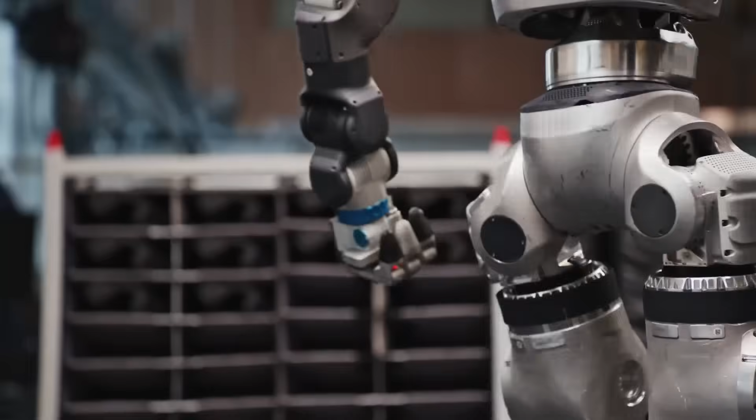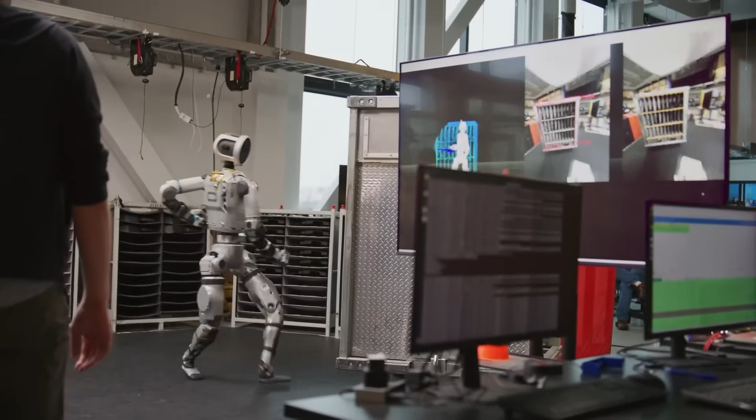You ever get that weird feeling when a robot moves just a little too naturally, like it's thinking, reacting, almost understanding? That uncanny moment when it doesn't just look human, it acts human? Well, that's exactly what hit me the moment I watched the latest update from Boston Dynamics.

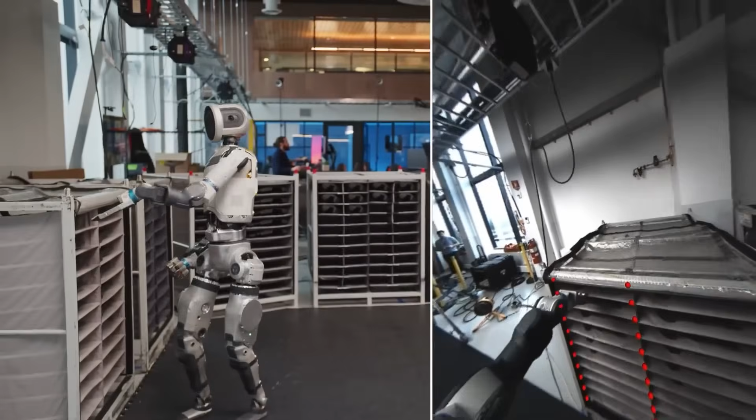Atlas, the humanoid robot we've seen flipping through obstacle courses and running like a mechanical gymnast, has taken a giant leap. This time, not in height or speed, but in awareness. What they just unveiled isn't just a smarter robot, it's a different kind of intelligence altogether.

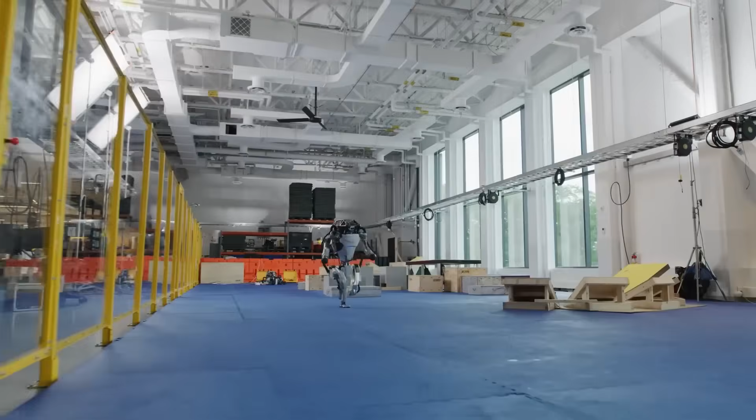I mean, watching it perform a routine task suddenly didn't feel routine anymore. It felt intentional, even thoughtful. Like, I found myself forgetting I was looking at a machine. Let me walk you through what just happened, because trust me, it changes everything we thought we knew about robots.

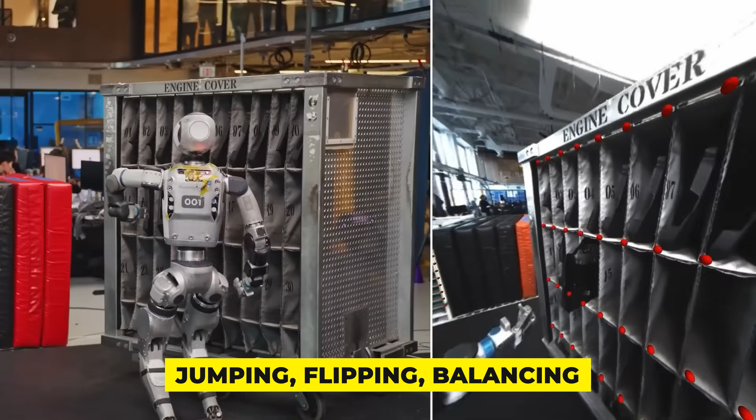Boston Dynamics has always impressed me with Atlas's physical abilities. Jumping, flipping, balancing like a parkour master. But this latest update, it's not about movement, it's about perception. And honestly, that's way more important.

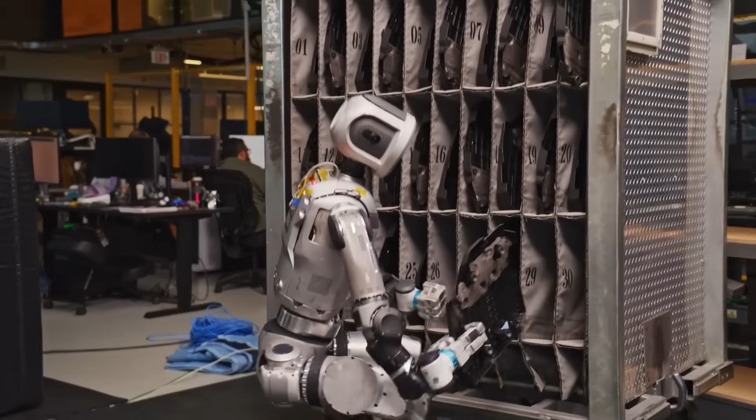Because if a robot's going to work in the messy, unpredictable world where you and I live—factories, homes, warehouses—it can't just be strong or fast. It has to see, to understand, to adapt. And now, Atlas can. So here's what blew my mind.

In the latest demonstration, Atlas performs a seemingly simple task. It picks up an engine cover and installs it onto a mock car engine. Doesn't sound like much, right? But the moment I looked closer, I realized what's happening under the surface is anything but simple.

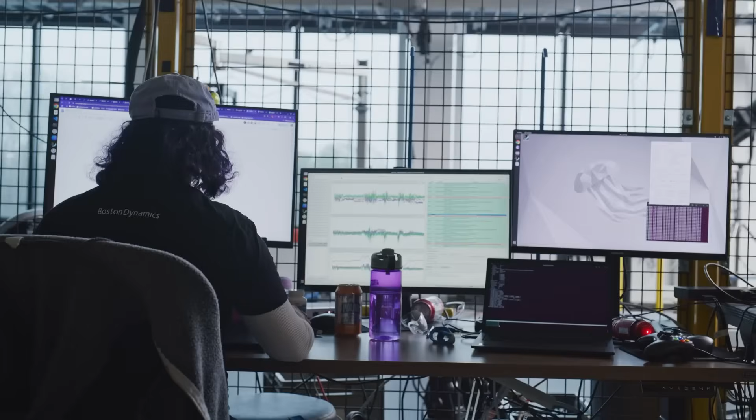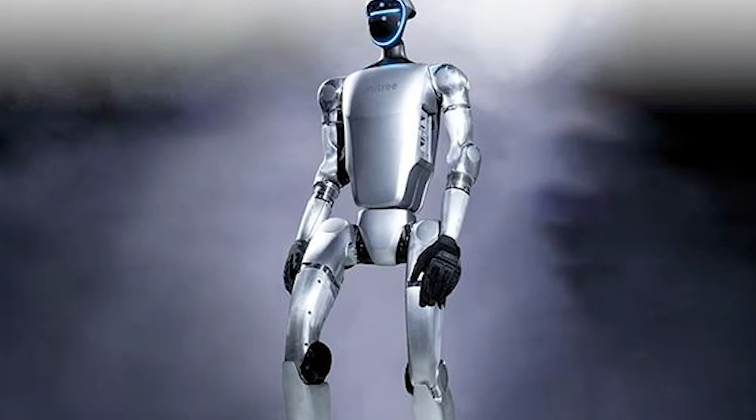Atlas isn't just grabbing something and placing it. First, it scans the environment and identifies the correct object. On its own, it figures out how to approach it, how to grasp it, and how to navigate around any obstacles in the way. And it does all this without any pre-programmed script tailored for that task.

That means it's not following a plan it was fed in advance. It's making its own plan, in real time, based on what it sees in the moment. That's perception. That's adaptation. That's exactly what makes this robot feel almost too human.

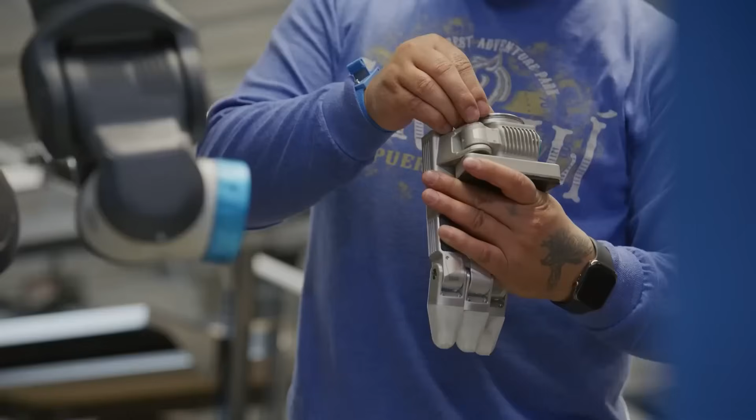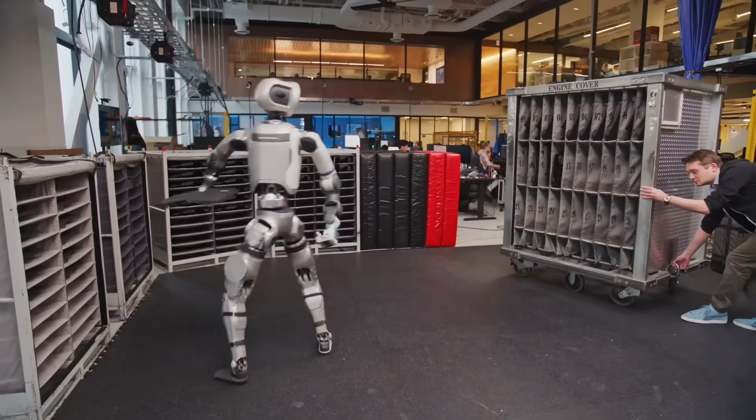The way Boston Dynamics got there is wild. They gave Atlas an upgraded perception system, a fusion of visual sensors, depth cameras, and machine learning models. So now, instead of just seeing pixels or outlines, Atlas understands 3D geometry, spatial relationships, and even the function of objects in a scene. Like, it doesn't just know something is an engine cover, it knows what it's for and where it's supposed to go.

That's not something you can fake with code. That's cognition. When I saw Atlas evaluate the orientation of the object, adjust its grip, and dynamically plan its motion on the fly, I realized something big.

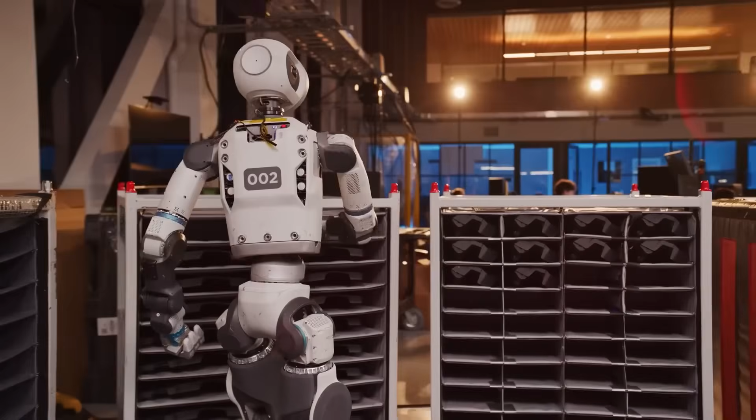This isn't just a robot executing a trick. It's a system that's beginning to reason. And that's the shift. Because up until now, robots could do impressive things, but only under highly controlled conditions. One tiny change in lighting, or position, or timing, and they'd fail.

But not this time. Atlas is now capable of real-time replanning. That means if something unexpected happens, like the object shifts slightly or something gets in the way, it doesn't freeze or glitch out. It recalculates, it adapts, it proceeds, just like a human would.

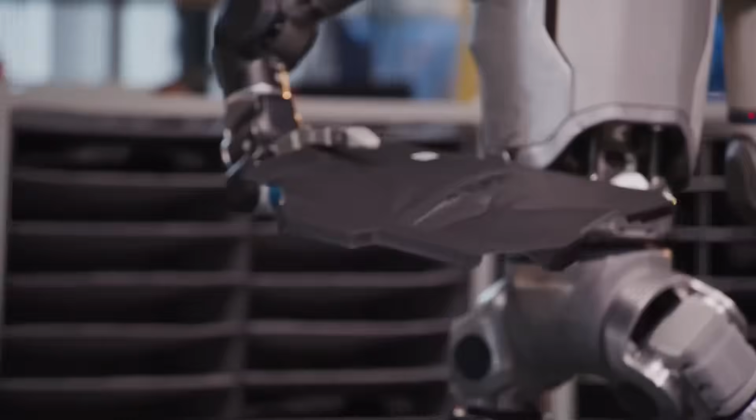That adaptability is a massive milestone in robotics. I mean, think about it. Traditional robots are rigid. They work on scripts, change the script, and they break. But Atlas? Atlas is operating in a flexible, reactive, intelligent way.

And it's all thanks to the machine learning models powering its new brain. This system doesn't just collect data from cameras and LiDAR, it interprets it. That's the real challenge Boston Dynamics had to solve. Cameras can flood a robot with information, but knowing what that info means, that's where the magic happens.

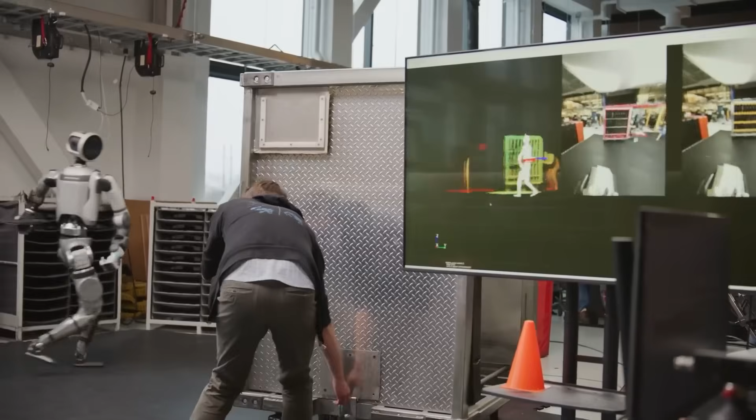And here's the part that really hit me. When Atlas looks at something now, it's not just labeling objects like, oh, that's a chair, that's a table.

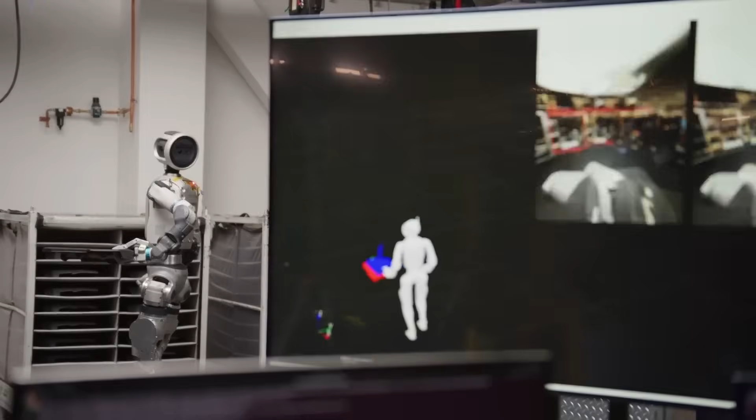It's already thinking about how to interact with it, how to pick it up, what kind of grip it needs, how much force to apply, how to keep its balance while doing it. Vision and motion are now tightly coupled. That's why its movements look so fluid, because it's not reacting in steps. It's flowing from one intelligent action to the next. It's honestly spooky how natural it feels.

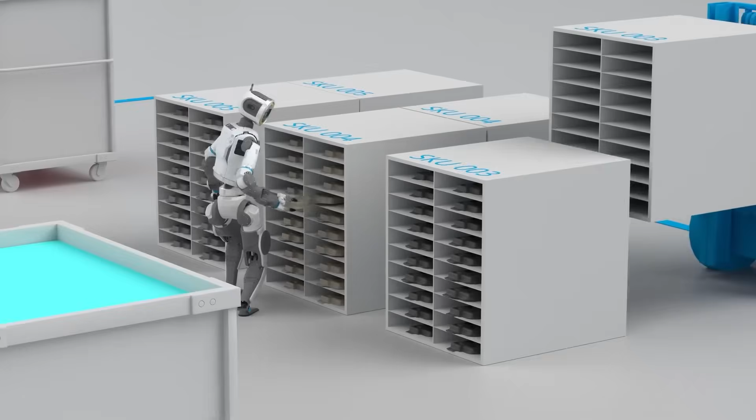Now let's talk about unpredictability. Because even in a demo setup, the real world is full of surprises. Lighting can change, objects can shift, textures can throw off sensors. But what blew me away was how robust Atlas is now. It's not just passively reacting to visuals, it's actively reasoning about what it's seeing. That means it doesn't just detect an obstacle, it figures out how to respond in a smart way.

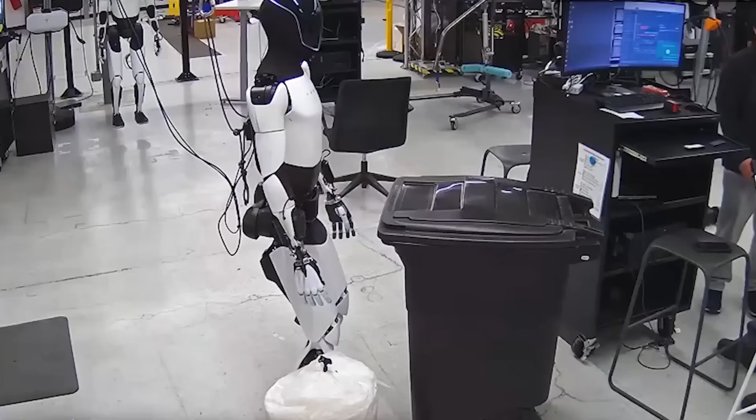But the foundation, it's there now, solid and real. And from what I've seen, they're moving in the right direction. There's also something else happening that's changing how I think about robots, not just Boston Dynamics, but across the entire field. Take Tesla, for example. Their humanoid robot Optimus is being trained in a whole different way. Instead of relying purely on human-controlled data,

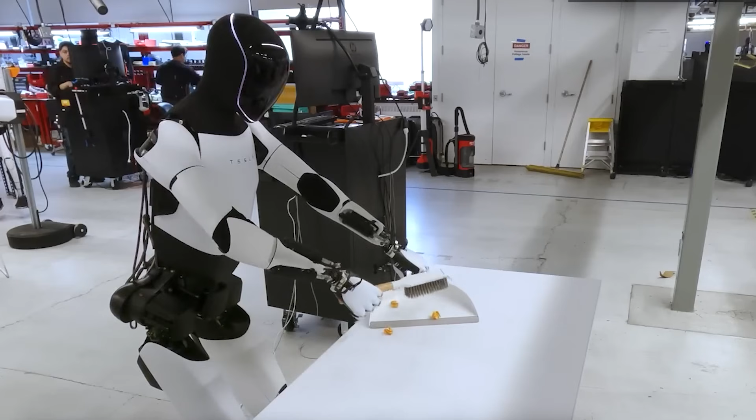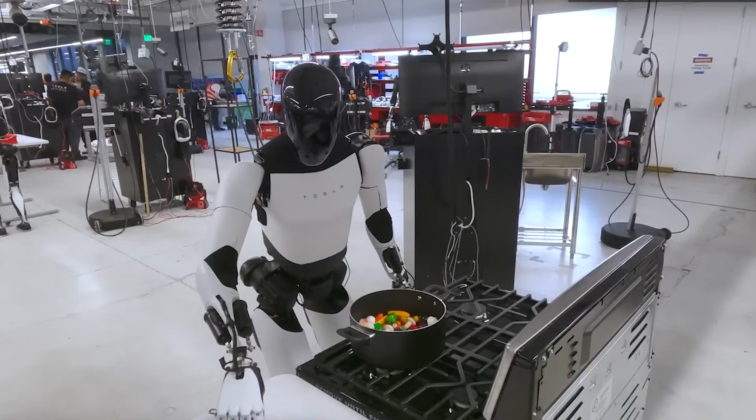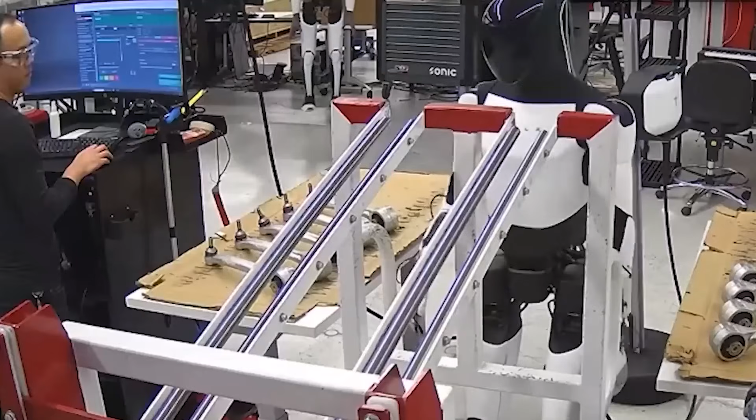Tesla's figured out how to make Optimus learn by watching videos, YouTube-style videos of people cooking, cleaning, folding laundry, and doing everyday stuff. Things I do, things you do. And now the robot watches it, learns it, and tries to do it itself. That's a huge leap, because we're talking about third-person video, stuff filmed from the outside, and translating that into first-person action for the robot. It's like me watching someone tie a knot, and then figuring out how to do it myself without being told step by step.

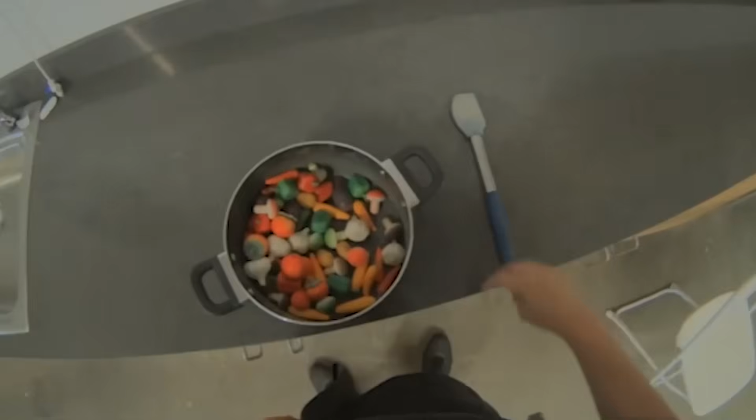Tesla's building an AI system that learns from virtually any video online. That means instead of collecting slow, manual training data, the robot can learn from thousands, millions of publicly available videos. That's nuts. And here's the kicker. Everything Optimus learns gets run through one single multitasking neural network. That's its brain. It interprets natural language commands, carries out complex actions, and even connects what it's seeing to what it's supposed to do. So you could literally just tell it, fold the clothes, and it figures it out based on all the video data it's consumed. That's no longer just programming. That's something way closer to general intelligence.

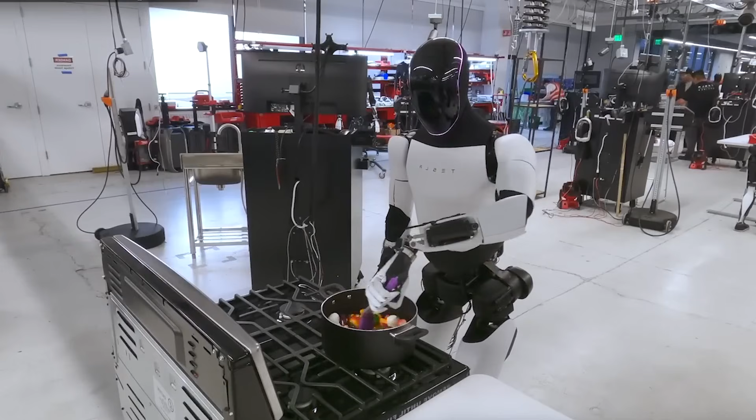Tesla is basically treating Optimus like a child learning to walk and talk, watch the world, try things out, make mistakes, get better. They're even running simulations where the robot learns from its own trial and error before ever touching the real world. That's the same self-play method that made AI unbeatable in chess and Go. Now it's being applied to physical reality. Let that sink in.

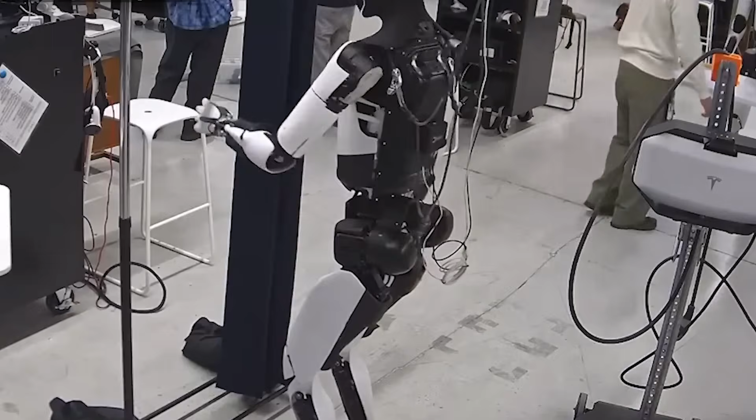Then there's Figure AI. Their humanoid robot, Figure 02, is doing something jaw-dropping. Not in a lab, not in a staged demo, but in a real BMW factory. Figure 02 recently completed 2 back-to-back 10-hour shifts, doing actual production work. That's 20 hours of real labor in a live environment, side by side with human workers. Not hypothetical, not simulated, real.

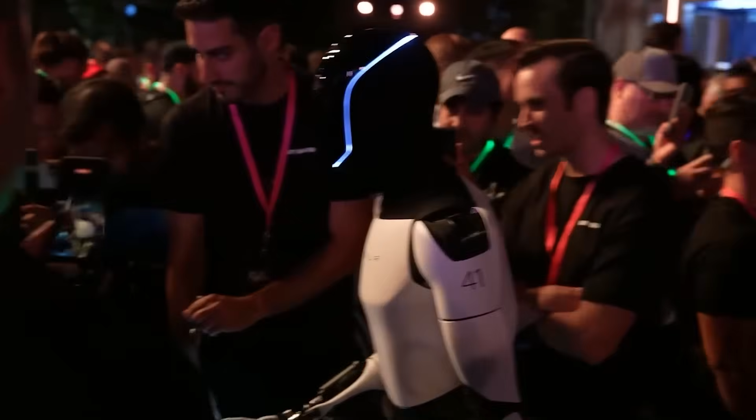This isn't just a robot surviving a shift. It's Figure 02 thriving in real-world chaos. It adapts to shifting parts, handles long hours, and fits right into existing factories without needing major changes. Unlike traditional industrial robots that repeat mindless tasks, Figure 02 works with people, responding to its environment like a teammate.

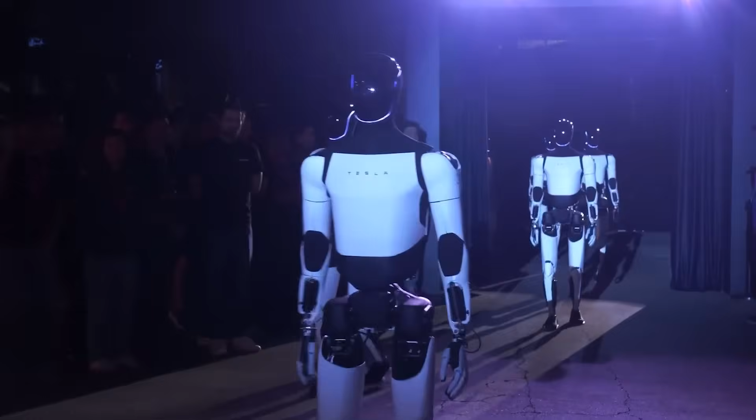And it's not alone. Atlas is starting to see and understand the world, while Optimus is learning from videos like a human child. These aren't science experiments anymore. They're the first real steps toward a future where robots aren't just tools. They're co-workers, assistants, maybe even roommates. If this is only the beginning, then what Boston Dynamics just did to Atlas isn't robotic. It's shockingly human.